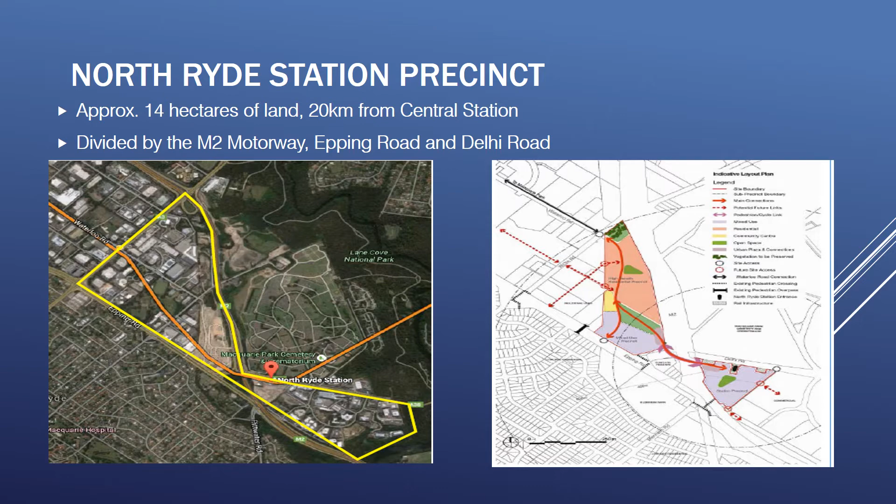The area is bounded by several major roadways: Epping Road and M2 motorway to the south, beyond which is predominantly low-density residential; Lane Cove Road to the west, beyond which is Macquarie Park commercial industrial area and Macquarie University; the M2 motorway and Delhi Road to the north, beyond which is a cemetery and a waste disposal facility; and bushland and Lane Cove River to the east.

The area is serviced by two underground train stations, North Ryde in the eastern portion and Macquarie Park Station in the western portion. The stations are 1.3 kilometres apart, but 1.8 kilometres by foot, which is approximately a 25-minute walk.

The area is currently predominantly commercial and industrial, with low density, diversity, and mix of uses, building types and public spaces. The area is underutilised during evenings and weekends.

There were many large vacant lots observed, and several new high-density residential construction projects were noted in the vicinity of the North Ryde station. Currently, minimal commercial, retail and social and cultural activities are in the area.

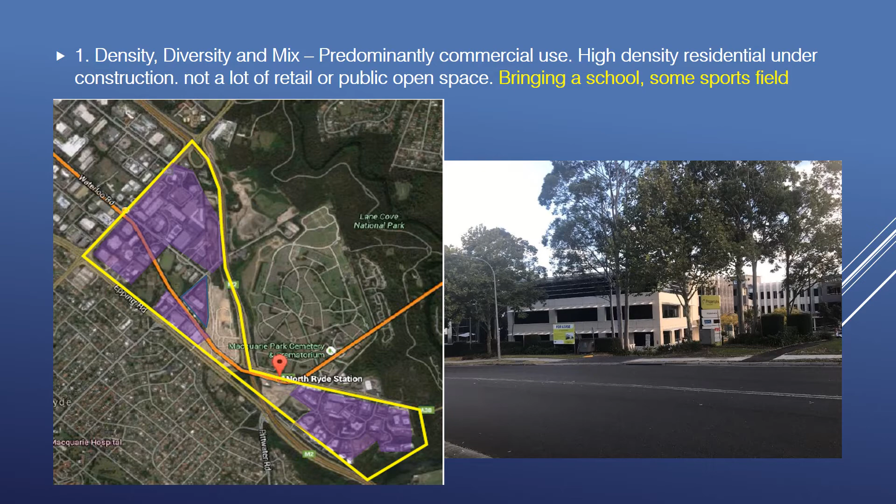However, Urban Growth New South Wales is delivering a new master plan community in the area.

Pedestrians are not considered first. It is clear the area is dependent on cars. Pedestrian and cycle paths were narrow, disjointed and clearly not well planned or prioritised.

For example, a pedestrian bridge over Epping Road appeared like an afterthought. It was largely unused and ineffective.

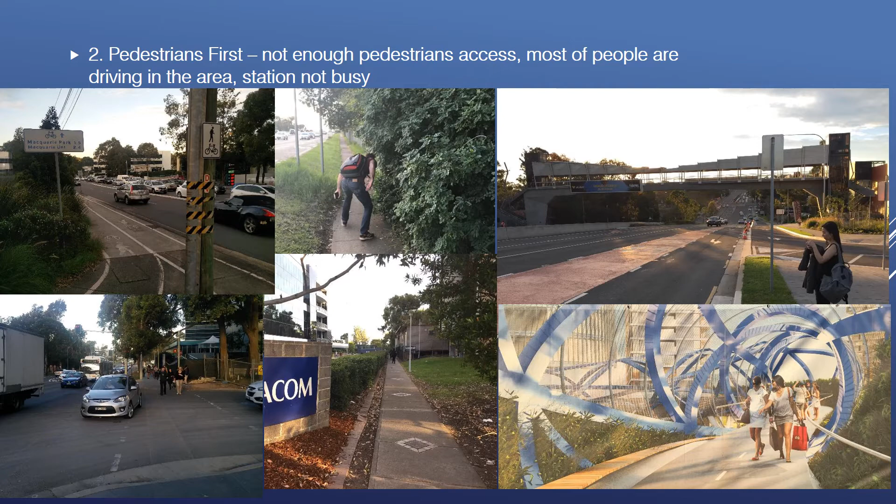There is also a proposal for a new pedestrian bridge over the M2, Epping and Delhi roads, connecting the new high-density residential area to the station. This may also prove ineffective.

The area is supported by the two stations and a multitude of bus routes. The train line only runs east-west but connects to nearby north-south travelling lines.

It was noted that relatively few people use the train at peak hour. Our observations were that the area is still very car dependent, which causes heavy traffic, which also slows buses.

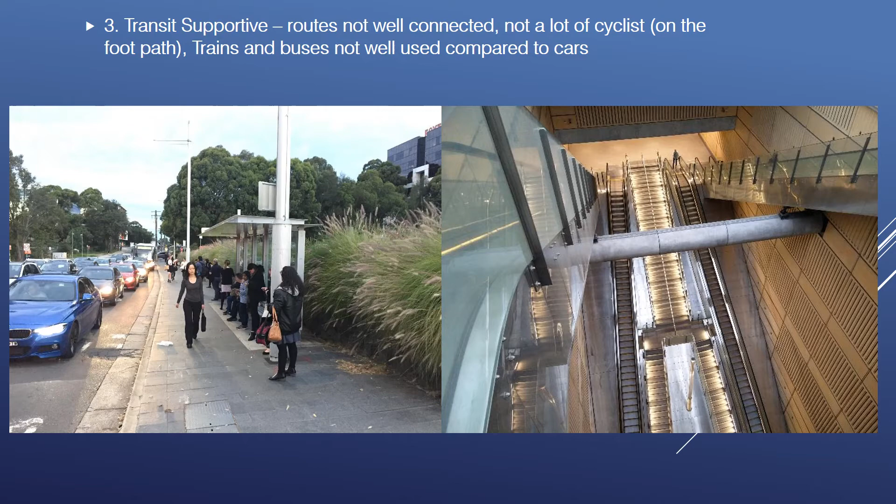There was a lack of obvious landmarks and very limited placemaking, which are only in relatively newer private office properties closer to the stations. Places tended to be small open grass and landscape areas with little to no cultural attractions

or vibrancy. Nothing in the way of public open space or village centre was observed in the area. However, some placemaking appears to be under construction as part of the large residential developments.

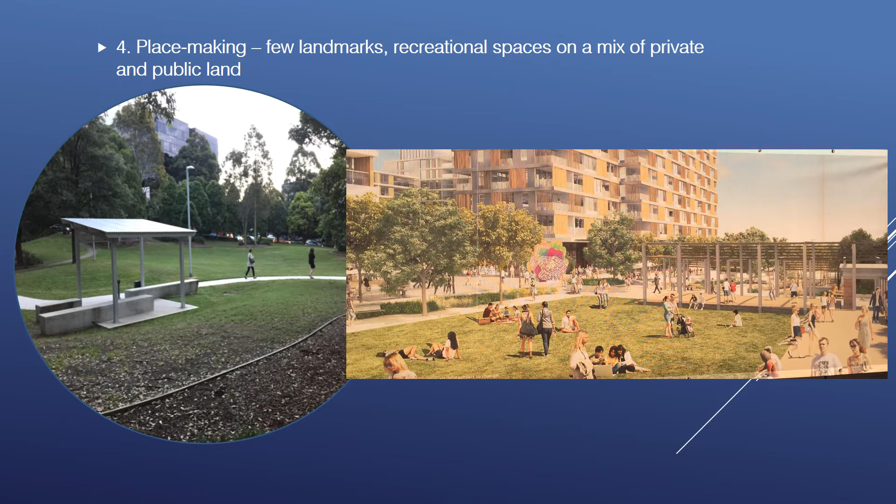Currently, there is little in the way of complete community. Only a few services such as daycares and day surgeries were provided for workers working in the area.

There is little to provide the needs of daily living within 500 metres of the eastern or western portions of the area. There is also a disconnect between the two areas created by major roads such as the M2, existing smaller internal roads, existing uses and topography.

The area located between the two stations had no community services to speak of.

There is mixed levels of integrated natural systems in the area. Natural systems were more obvious in the relatively newer areas nearer to the stations. In the older areas, buildings clearly have done little to integrate natural systems.

The urban design principle relating to integrated technical and industrial systems aims to reduce the negative impact on the environment. A number of for sale and lease signs for new development were observed in the area. Many of these signs advertise Green Star and or NABERS ratings, which is positive for the environment.

Train stations and buses were evident, however vehicle traffic was observed to be high. This suggests people are choosing to drive a vehicle rather than take public transport. It appears local commercial properties provided car parking and the footpath system was not as effective as it could have been. These observations do not promote walking and the use of public transport.

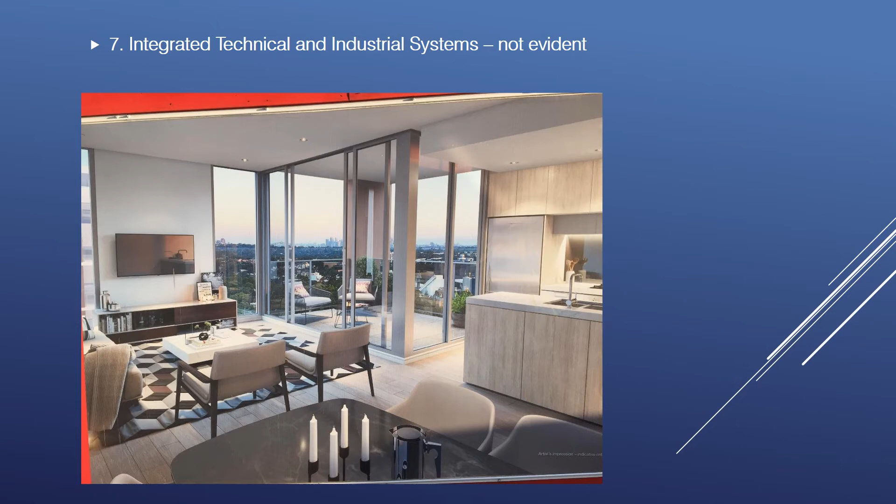Our recommendations for improving the area to address this urban design principle would be to improve the effectiveness of footpaths, provide bus lanes and pull-in bus stops to reduce congestion on the road, continue to promote Green Star NABERS, and try to attract corporate tenants, which will bring low carbon footprint initiatives.

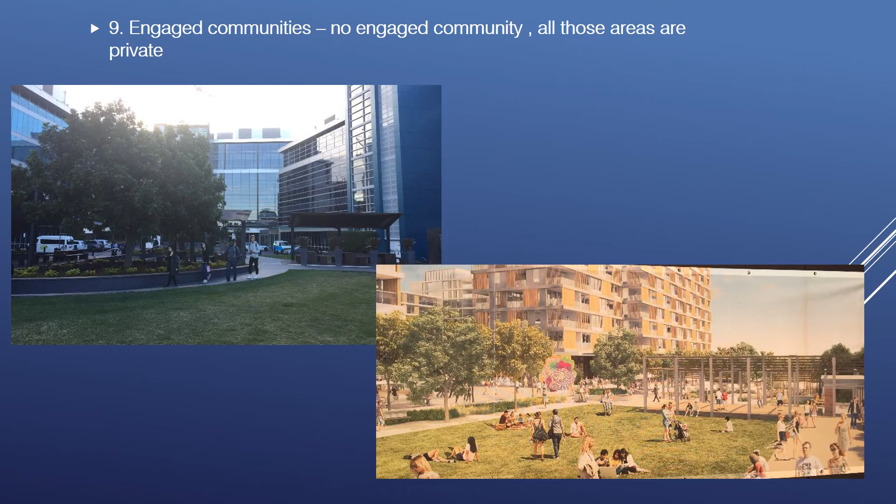Engaging the community appeared to be a challenge for the area. Epping Road appears to dissect the study area from the residential area, and therefore there appears to be a disconnection between the communities. There was not a lot of community open space, as most of it was private. This then reduces the likelihood of community engagement for future development. Our recommendation would be to create more community areas and promote community engagement through stakeholder needs identification.

Redundant and durable life safety was considered in the area. It was observed the community was still heavily reliant on cars. There is good access to the train network, however the arrangement of bus stops created uncertainty for users and increased the congestion on the road.

There were very few covered areas for pedestrians to walk, which would deter people from walking in heavy storms. We are unable to comment on the key infrastructure such as water, electricity, police force, etc., without undertaking further investigations.

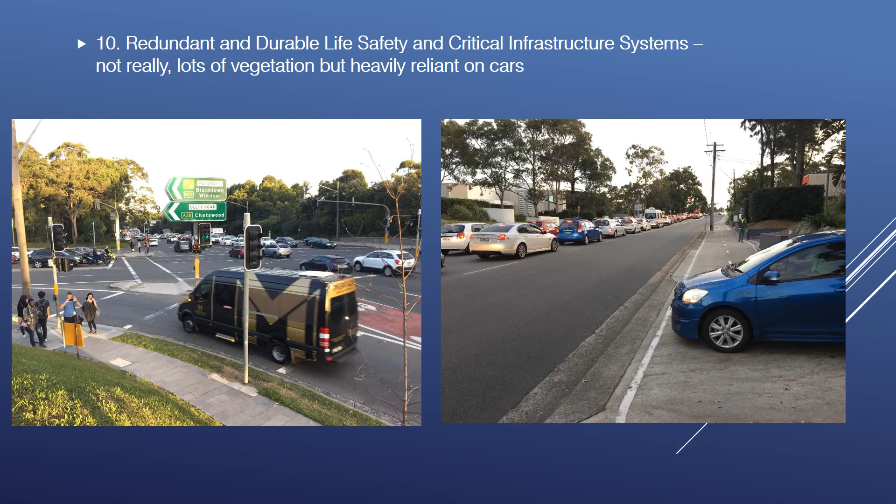Resilient operations were considered for the study area. A lot of the development was low-rise commercial buildings, and there was limited area for the development to sprawl. With limited vacant blocks of land, there will be a need to demolish older buildings to construct new high-rise buildings to increase density across the area.

Diversity across the area is improving with large residential developments under construction. With the exception of trains, the transport network did not appear great. The area was not sympathetic to pedestrian or cyclist movements.

There were no schools observed in the area, and therefore with the new residential developments there will be a need for a school. There is a large vacant site on Epping Road which used to be a school, however had been relocated a number of years ago.

A recommendation to address resilient operations in the area would be to promote high density to limit the amount of sprawl and extent of essential services, promote diversity with different development types, and reintroduce a school to the vacant block on Epping Road or another location.

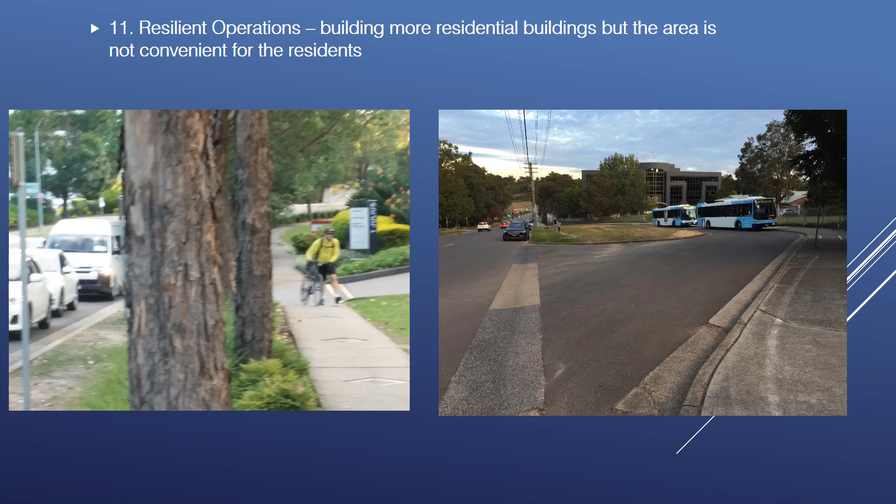In order to create a resilient community, diversity of the area needs to improve. This has been initiated with the mixed-use developments currently under construction. Pedestrian access was very poor and needs to be improved across the area and also between the two nodes, being the two train stations.

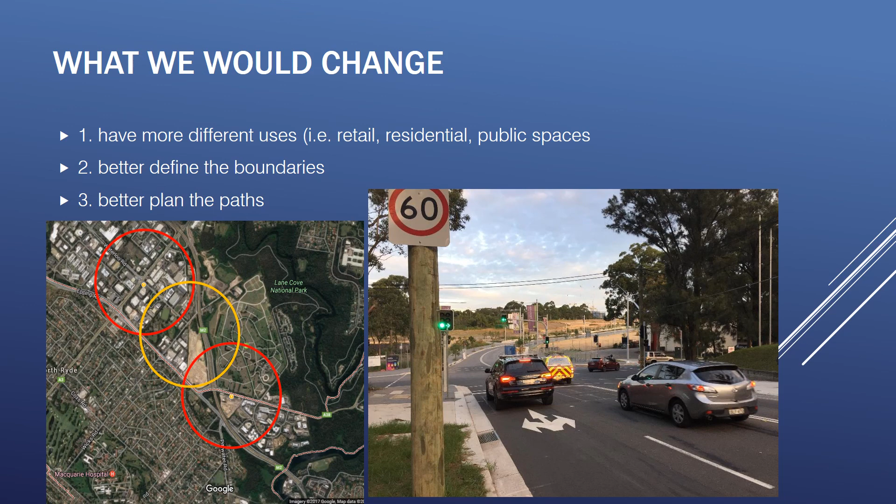Thank you for listening to our assessment of the urban design principles of the North Ryde precinct.